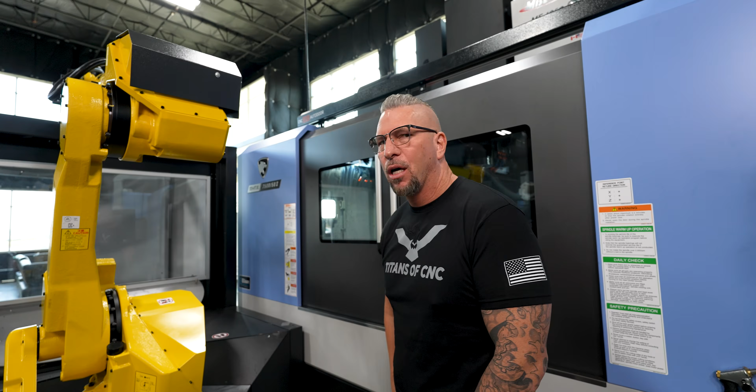Oh man, you guys are in for a treat today because we are on the Mynx Beast, bad boy from DN Solutions, and we have a crazy titanium aerospace part, and we're gonna actually go through the entire process. I'm gonna teach you all facets of how to machine this part. And then you can take all of that knowledge, you can go quote SpaceX, Blue Origin, quote the same parts, and you can use these techniques to actually make good money. Boom, let's go.

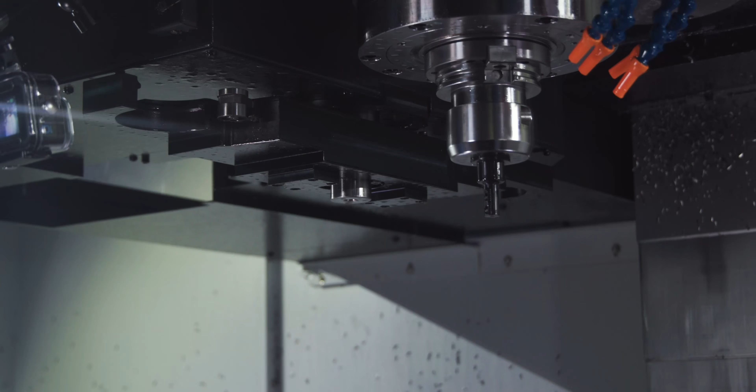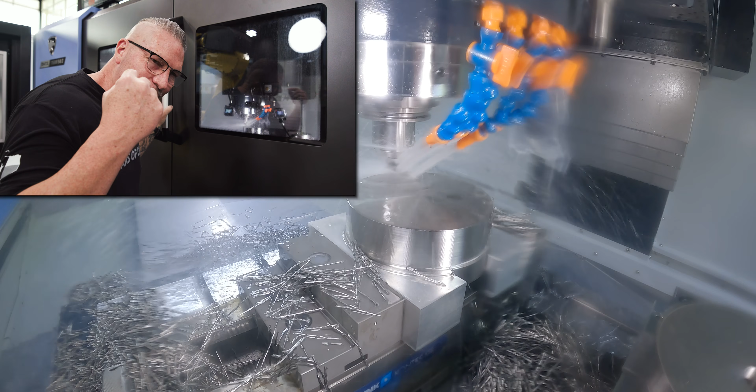You can hear that end mill sounds so good. So that's the HARVI III. I'm taking a 10% step over, full depth, 400 surface feet. We're at a chip load of 0.0043. Right now we're just machining the octagon around it. And then we're gonna flip it over and drop it into the octagon pocket on the other vise.

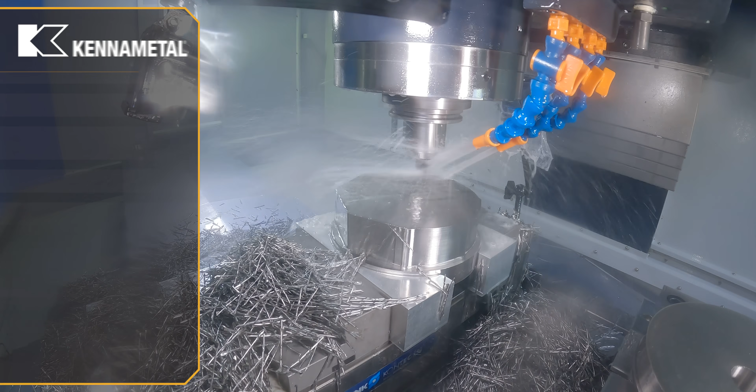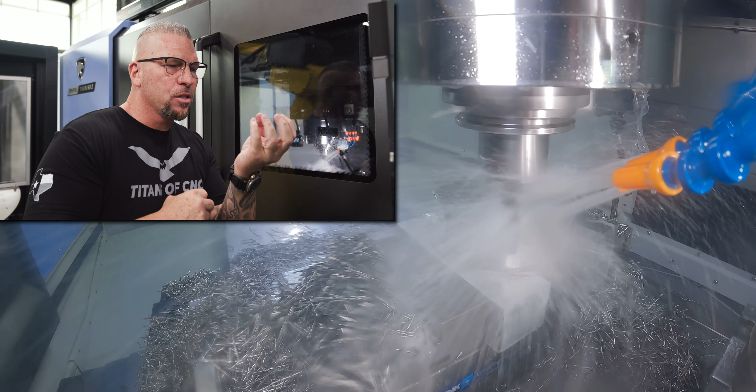Now we stepped up and we're on the second level right there. We're coming around, and as it comes around, it's actually gonna leave an island, and that island is gonna end up being a male thread that's actually sticking up. It'll be pretty cool because we use a key cutter to come down around the bottom of it. We're gonna thread mill it. It's gonna come out absolutely beautiful. I'm gonna show you guys all of the techniques surrounding that whole process.

Back in the day, I was doing subsea parts and we were making parts for ROVs that went to the bottom of the ocean. A lot of you guys know the story, but there's a lot of new people that I haven't told the story lately, but we were running so much titanium for all of these parts. You know, they were going to the bottom of the ocean for ROVs that had robotic arms and all that, I just became an expert at machining titanium. Our company just became an expert.

So as soon as I read an article about Elon Musk in Inc. magazine, I think it was like 2007, I was like, I want to do parts for that guy. And I started sending letters, sending emails, I made friends with the ladies in the office. I did everything to get through that door. It took me 6 months of non-stop trying. And then I got an opportunity, and in one single day, I came in, I looked at my email, I had quote after quote after quote. They just got tired of hearing from me, and they're like, okay, let's see what this guy can do.

Yeah, we started quoting, and then we started running parts. And that made us the first vendor for SpaceX outside of Hawthorne, outside of that area. We were in Northern California, and it's crazy. So, you know, it's just like a testimony. If you put your mind to something, you can achieve great things.

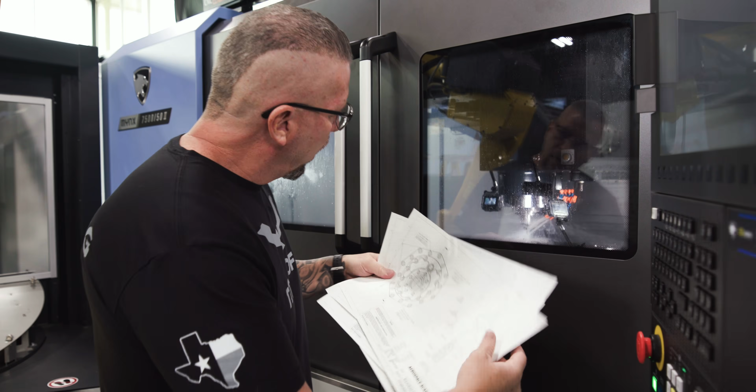Boom. And this is basically the operation we're on now. The way that you actually look at this print is, you look at the print, you have a section cutaway, so you basically take from the A to the A, you take it away, and then you look at it from the inside, and that's that view right there. And then we can see there's another section that's actually cut away from there.

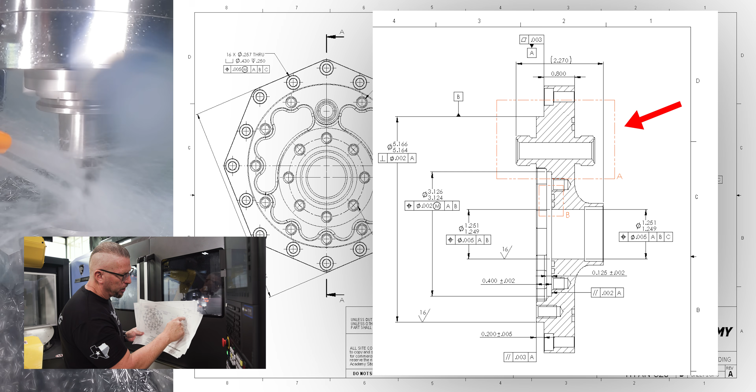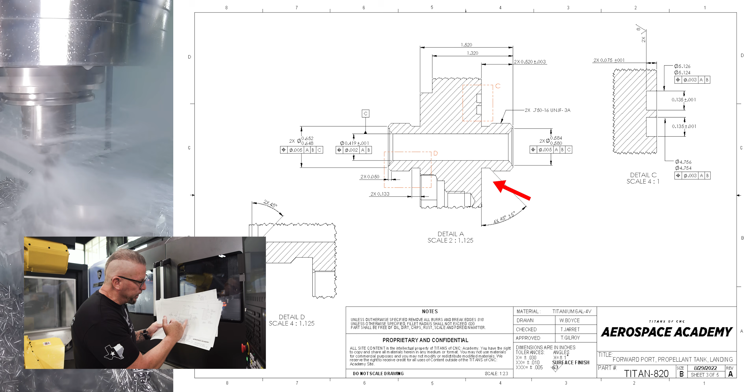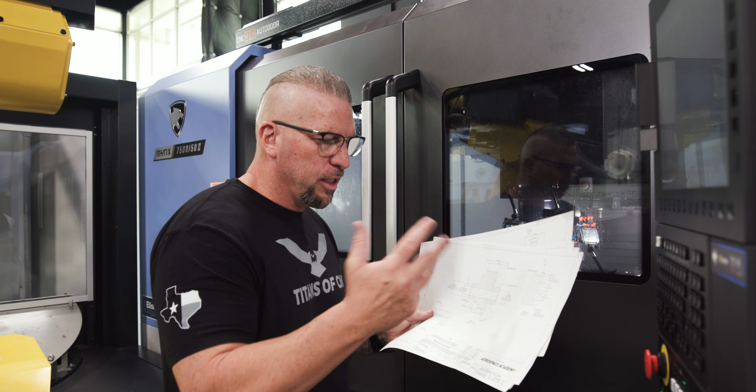If we go to the next page, we'll come to that section right here, detail A. When you look at this, you'll see two times we have a 3/4-16 UNJF 3A, so that's a male thread sticking out there. We got a relief coming in here which we'll hit with a key cutter, and some nice tight tolerances as far as the 0.419 diameter coming through. We got true positioning, plus or minus 1/1000th. When you look at this print from our Aerospace Academy, this is a legit print. All the notes are completely legit, and the specs are exactly like you would see if you're making this part for SpaceX, Blue Origin, Lockheed, any of those companies.

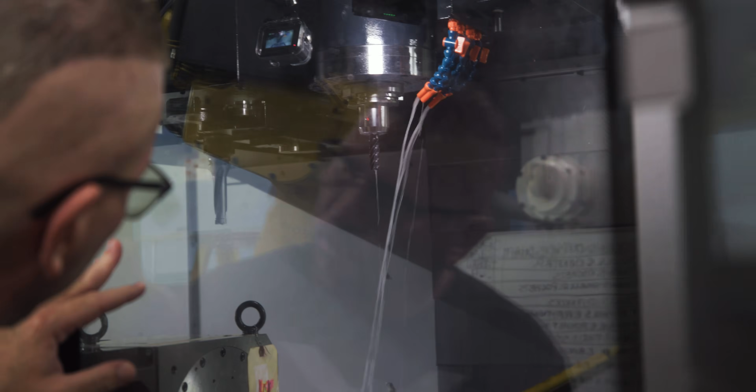We got coolant through so that at the point the insert's hitting the material, the coolant is right there to cool everything off, so we can actually make some nice chips and get right through that material. Super good. The Mynx Beast, baby, from DN Solutions. Love this machine.

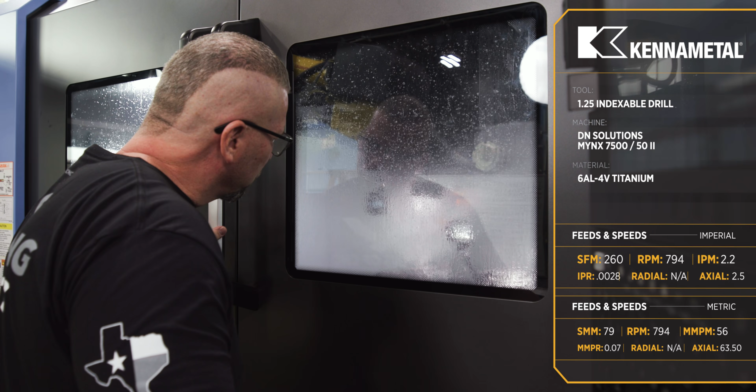So you can just see the drill. Listen to that, it sounds so good. It's just going straight down inside, popping out nice big chips. Beautiful, so we just broke through. Boom, I'm gonna stop it right there. The drilling went absolutely perfect.

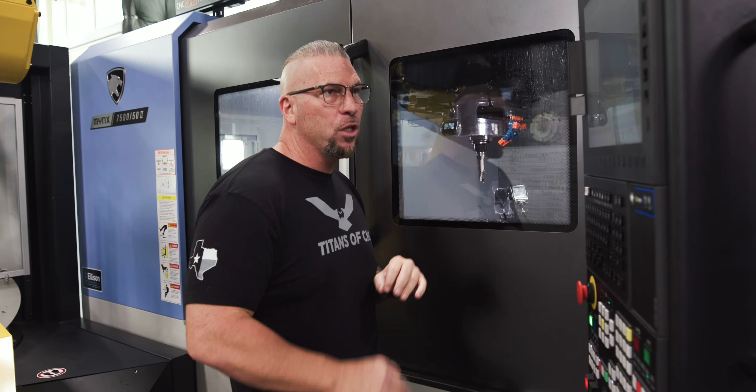Now that we've machined everything around and on top, we're gonna drop to a 1/2 inch Harvi 1 TE. We're gonna drop into the hole and start pocketing with the 1/2 inch. Then there'll be some other cavities that have smaller radiuses on the outside, and we'll drop to a 3/8 Harvi 1 TE to get all those radiuses. I like this cutter when I'm down inside pockets, and actually take a nice cut, boom, boom, boom.

We got the Synergy 735 coolant blasting on it. Listen to the sound of that cut right there. That's cutting titanium, 6Al-4V, sounds so good, amazing. Now it might seem like I'm going slow, but if you actually look in a machinist's handbook, a standard surface foot for titanium with carbide would be about 175 surface foot. So at 400, I've more than doubled that, but it's the technique.

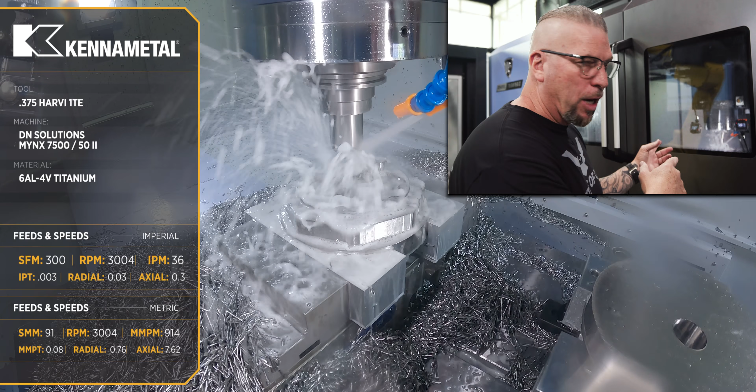I was running flood coolant and through the spindle coolant, and that's why it was just raw. But most of the hard cutting is done now, and we're just coming in and kind of shaping the pocket. So I went ahead and turned off the through-spindle coolant, left just the flood, to get a little bit of a view. The whole thing with the TE is that because of the geometry of the tool, it can actually ramp down at 45 degrees. I didn't actually program it at 45, I programmed it at like 10, but helical in, boom, and it's just doing this blind pocket, and sounds beautiful.

We're in a tight little pocket down here, so I'm still going at 10% step over, but I dropped the surface foot down to 300, and then it's going into the ramp right now. You can hear it ramping down. No pre-drilling, just ramping straight into the material. Also dropped the surface foot when I do the ramp, basically cut that down, ramp inside, speed it up, boom. Chip load also came down, it's at 0.003 inches per tooth.

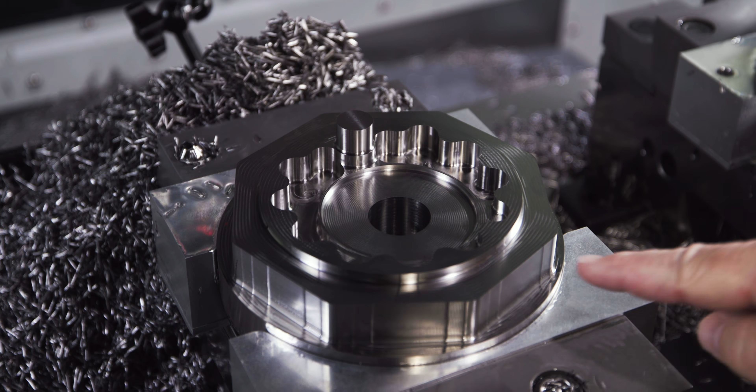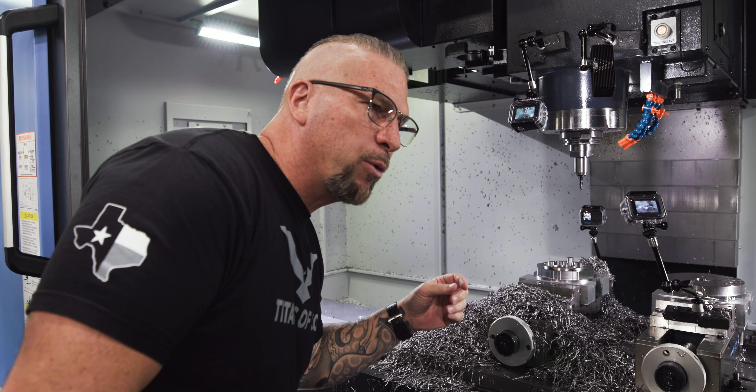Check it out, now you can see we came around the outside, stepped up one level, came around, then stepped up one more level, and left a little island up there. That's gonna be the male thread, 3/4-16. And then you have multiple levels of pockets inside, and basically the radiuses get nice and tight over here. So I went from a 3/4 inch Harvi 3 down to a 1/2 inch Harvi 1 TE down to a 3/8 TE. Nice intricate work, boom.

Next thing we're gonna do is come through with a 0.257 diameter drill. We're gonna drill around the outside, and come in with another drill and drill right through this bad boy right here. Then we're gonna open up the counter bores, and do some more finishing. Let's go.

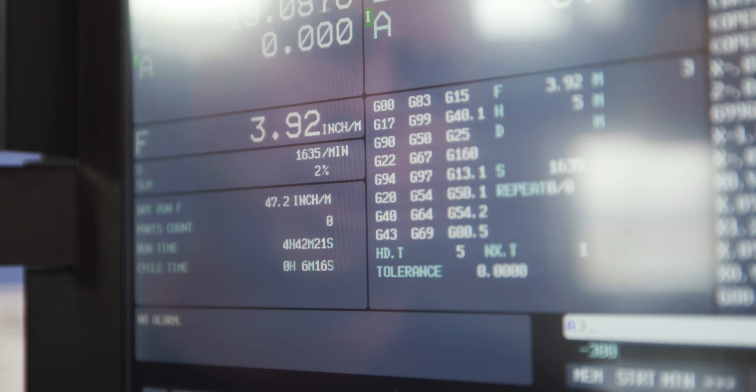We're at 3.92. Speed on the spindle is 1635. To get that, our surface foot is about 110, 109 on the surface foot. And then we're at 0.0024 on inches per rev.

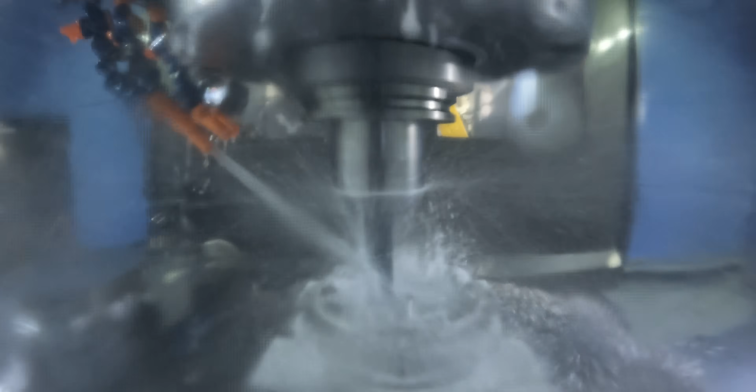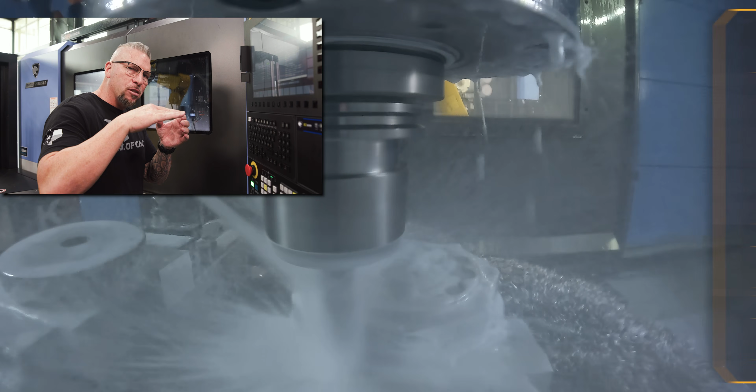Kissing the top of the spud that's sticking up. It's going to end up being a male thread. So I had the rougher come down, then I actually brought in my finisher, my 3/4 inch finisher, HARVI III Aero, and I kissed on the top, and now I drop down and I'm actually finishing the outside.

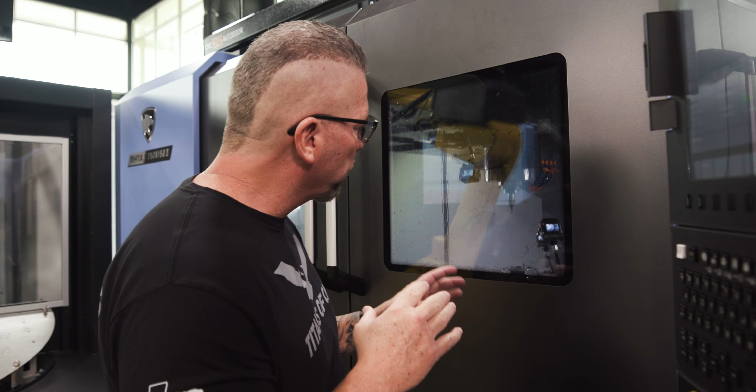So now we're under the 3/8 HARVI 1 TE finisher. This tool's gonna come in, it's gonna clean up the pockets, make them absolutely beautiful, and then we'll come back and we'll drill right through the top.

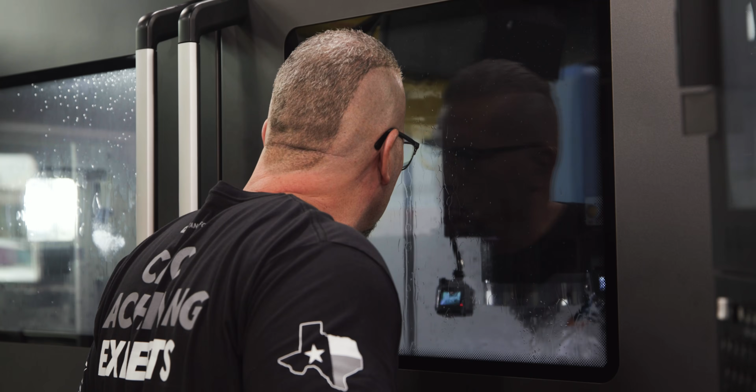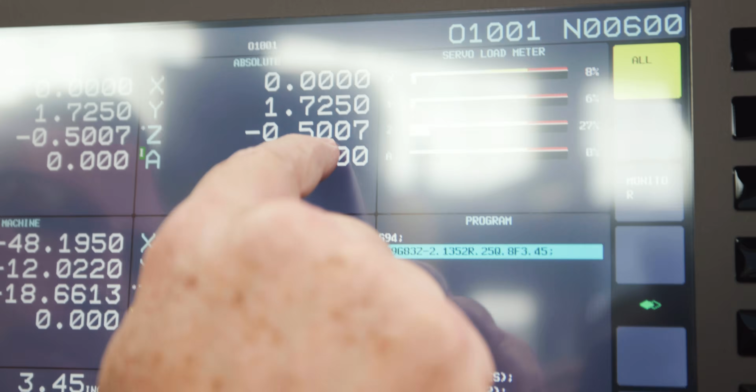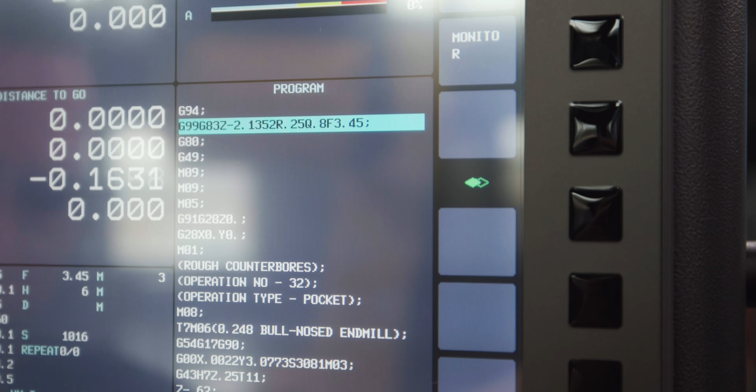Come over here, there's a lot of coolant in there, but you can actually just see it right here. This is the absolute, so this is how deep it's going right now. See the Q8 right there, Q8? That's my peck right there. So even though it's a through spindle coolant drill, I just like to get some coolant in there, some extra coolant, get the chips out of it and stuff.

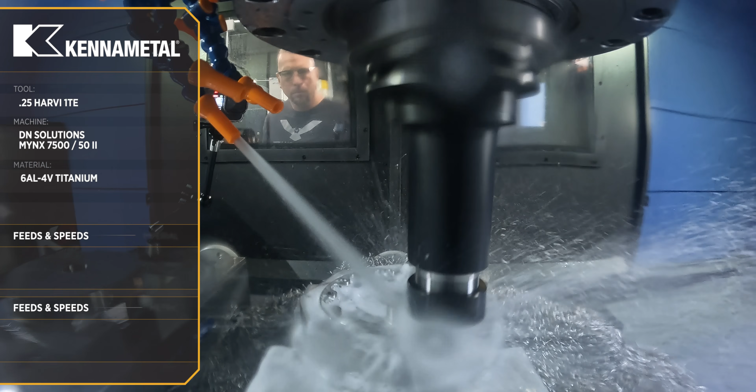So now we have a 1/4 inch HARVI 1 TE. We're actually doing all the counter bores right there. I got a surface foot of 200, and then my chip load is at 0.002.

Alright, now we're getting intricate. So we got a 1/8 inch HARVI 1 TE. This is actually gonna drop in and it's just gonna ramp slowly all the way down and basically do an O-ring groove at the bottom of the cavity or pocket.

Then I'll have a finisher that's gonna come in and just come in and kiss it, boom. So we have no witness marks. There's no lines. The O-ring has to be absolutely perfect.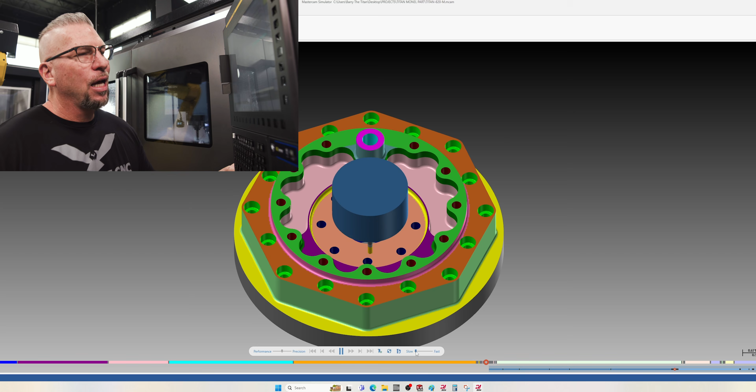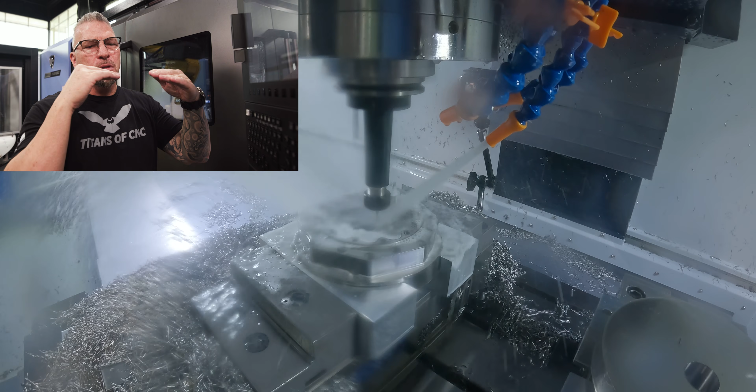I like to just do a nice ramp from above the surface and then just ramp slowly down in, getting to the bottom, and then I just come around, boom, and I just ramp out, come up. So as you come around, you can actually look at the absolute, and you can see as we're moving in X and Y, we're also moving down in Z at the same time.

Now it's chamfer time. So now we're actually chamfering it. Basically all the O-rings, the diameter in the middle, all the pockets, the outside, we're just putting a nice chamfer around everything per the print, making it absolutely beautiful, taking all the sharp edges away. And after this, it's gonna look really good.

Now, one thing to think about when you're using a chamfer mill is I have different depths and different widths. So when it comes to an O-ring, it's very shallow, so I'm gonna actually program it in a way where I only use the tip of the chamfer, just make it very small. So if it's like 125 thousandths wide, for instance, I'll probably go off like 40 thousandths from one side and then drop down a little bit, so I'll just use a little bit of the tip.

But then if I'm doing a bigger chamfer and I have all the room in the world, then I'll use a bigger part of the chamfer tool towards the top, and there'll be more strength there. I might program it 150 off, 150 down, and use a different part of the tool. So depending on where I am in the part, I'll program it differently based on the depths and widths I'm dealing with, using different parts of the chamfer tool, which helps with tool longevity, because you're using different parts of the edge to actually chamfer the part. If you only use one specific part for the entire thing, then you're gonna be wearing on that exact place right there. So, little words of wisdom.

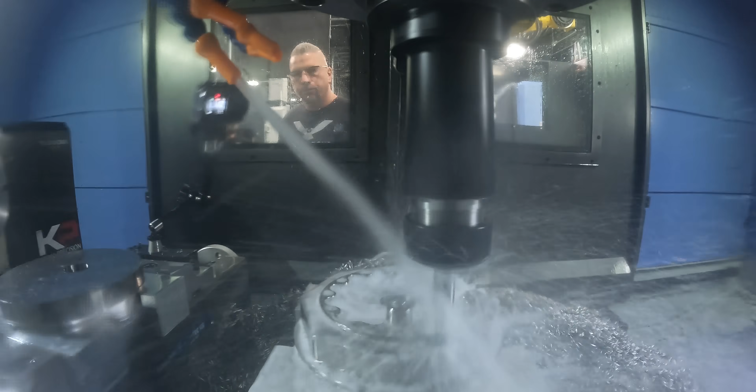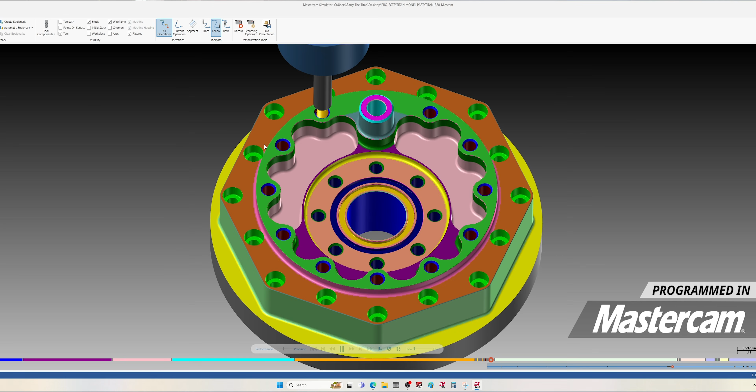So you can't see anything right here, but we're actually thread milling the 5/16 18. This thread mill has teeth coming all the way down, so what we do is basically drop to the bottom and helix up, boom. I like to come out, come back in, and do it one more time - that allows chips to flush out. We're just going all the way around, nice and easy.

I used to try to tap some hard materials and different things, but when you get into aerospace jobs and the material itself is like $3,000 for a piece of material, I just went straight to thread milling pretty much everything. If you actually break a thread mill, you can just take it out, replace it, and pick up your thread. If you're tapping and you break a tap in there, it's a nightmare. So.

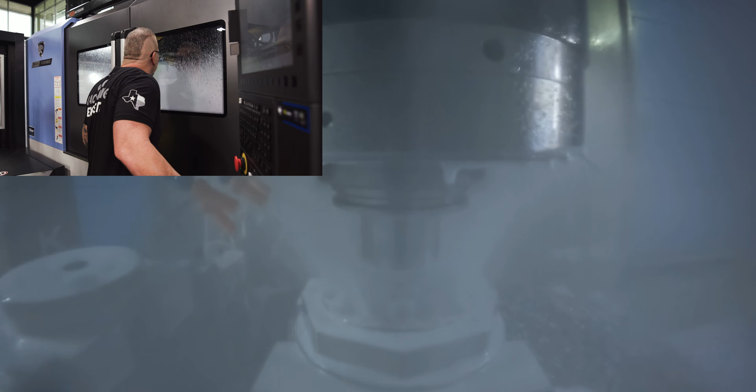All right, so now we're going to a key cutter. This is a special key cutter that Chris actually made on the Walter grinder. It comes up underneath the thread, but on the top it has the perfect angle for the thread. It's going to undercut the thread and give you the perfect chamfer on the thread for the lead in and lead out.

Another thing too, when I come in with a key cutter, you're dealing with tenths - I'll think about the pressure of the tool. If you have a bottom surface and I finish at say half an inch down, when I come in with the key cutter, instead of being like a half an inch, I'll be like 0.4996, just like 4 tenths above it, so I don't scrape the bottom and keep it nice and clean. Then I'll make simple adjustments so you can't feel anything, just so it's beautiful.

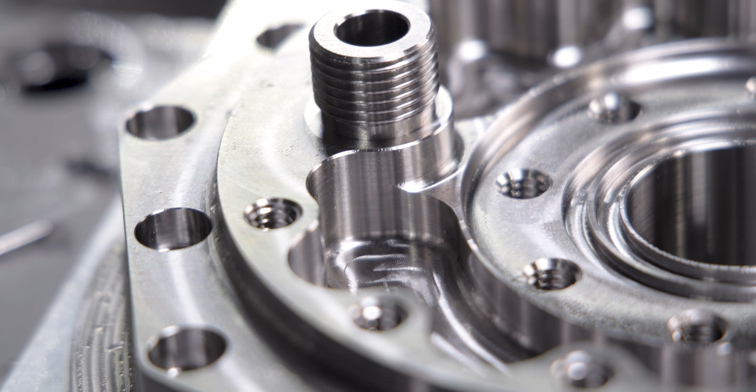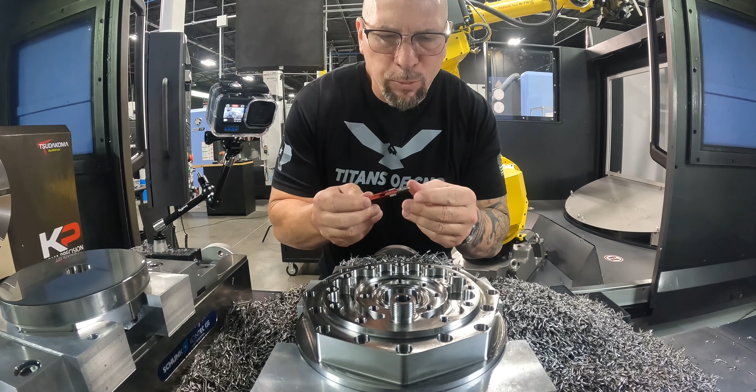Man, the part looks absolutely stunning. We're going to put it in inspection, double check everything right before I take it out. I'm going to double check the threads - you can always comp the threads if needed, but I'm pretty sure I got it absolutely perfect. Been doing this for a long time, so let's see. Right here we have a 5/16 18 UNJC3B, so I'm going to pop this guy in here.

Ooh, nice, nice, look at that, super nice. Drops down. Now we have the no-go, and it does not go. You can see the turn right here - it won't go, I turn it just like a quarter turn and it comes out. So basically it goes a quarter turn, absolutely perfect.

Now we got ring gauges to actually check out the 3/4 16. So we got the go gauge right here - this is a 3/4 16 UNJF3A, nice and fine. I'm going to pop this guy on and make sure it goes on absolutely perfect. Ooh, love it, look at this. Oh, just beautiful, beautiful thread. Wow, love that.

A lot of times when you do thread milling, you end up knowing how much more you go, because from experience you keep having to comp 3 thousandths or something. So over time you end up getting it absolutely perfect. But that's the go.

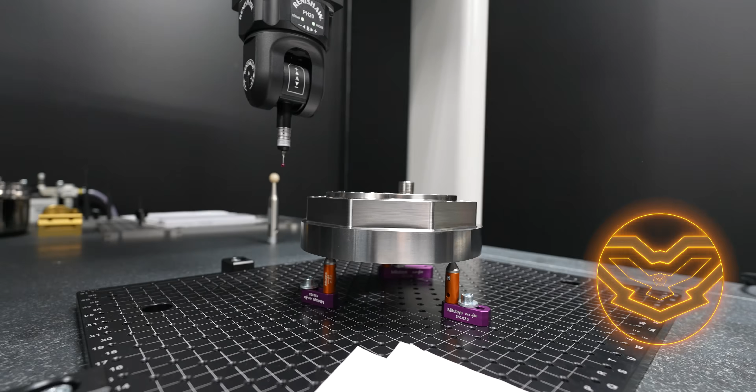A few moments later - and you know what's awesome is I was just talking to you about Travis over there, and boom, he's already working on the part. What's up, brother? We got the part right here on the Mitutoyo Crysta Apex, you're going to check out the part. Yes sir, make sure everything's beautiful. Then we're going to flip this thing over, put it back in the machine, do the second op. It's coming in a future video. Boom, thanks brother.